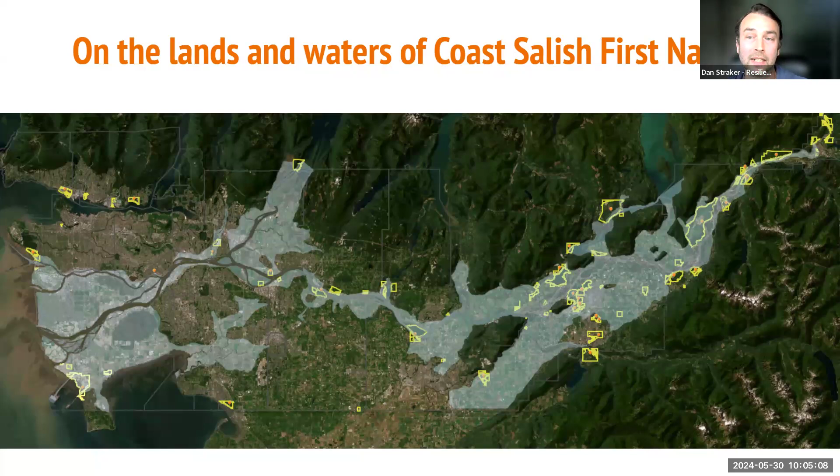A quick run through of our agenda today. We'll be doing presentations from our great panelists here and have a little bit of time for Q&A, and then we're going to shoot you into breakout groups, those of you that are brave enough to stick around and have some conversations about bank stabilization. We'd really appreciate your feedback. And this is an opportunity to say that we have Charlotte Milne here from UBC, and she's working with us to prepare a report on the findings from this workshop, as well as doing a lit review and some case studies on bank stabilization techniques. So your feedback in these breakout groups will actually get incorporated into a follow-up report.

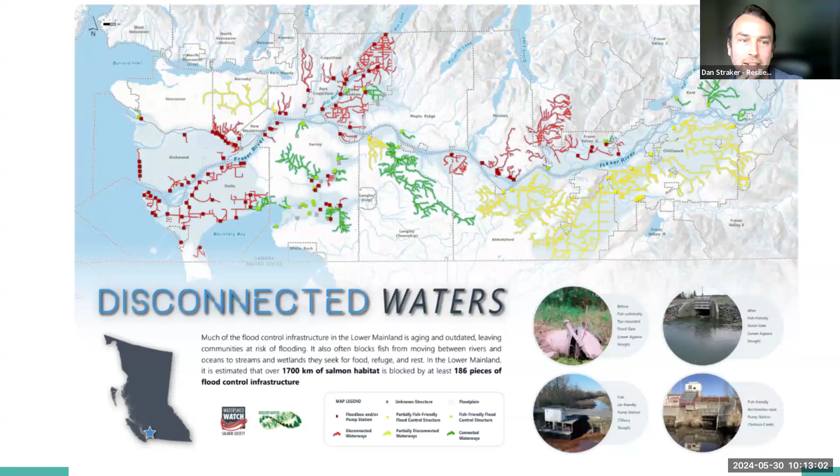So now we're up to 180 structures. Is that right, Lena? Yeah, with 1,800 plus kilometers of habitat, I think, or 1,700. Yeah, has been lost due to these pieces of flood infrastructure, floodgates, pump stations, and dikes. Today we're talking about banks because all those banks lead up to these flood structures, and I think there's just a value in talking about it.

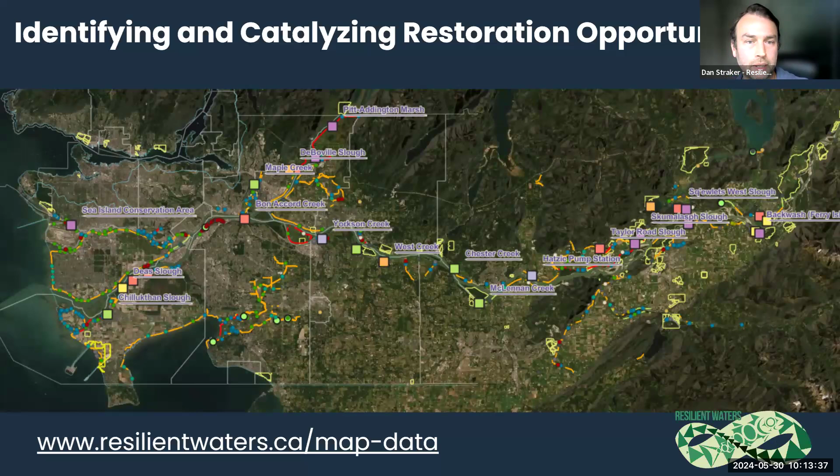Oh yeah, so just quickly to say, from the work that Lena was doing, we launched the Resilient Waters project in early 2020 to identify and catalyze restoration opportunities related to these pieces of flood infrastructure. You can check out the link there on the website, resilientwaters.ca, or get in touch with me if you have an interest in working on a flood structure that you think is barring salmon habitat. Then let's talk.

A quick note on the Lower Fraser Floodplains Coalition. This is a group that me and Lena and others in the group are part of. It's been working really since the atmospheric river in November 2021 on a more principled and collaborative approach to flood resilience for the Lower Mainland. And we're working basically to align with the BC flood strategy for regional work in the Lower Mainland now, as a quick update, as things have been progressing pretty nicely. And the reason I bring it up is it connects here. I think a lot of you are connected to that work in the Lower Mainland, so we're going to be talking with you soon.

The work that I do in the Resilient Waters Project is particularly oriented around this catalyzing of projects, and part of that is sharing information, sharing learnings, and building relationships. So that's a lot about what these webinars are about as well.

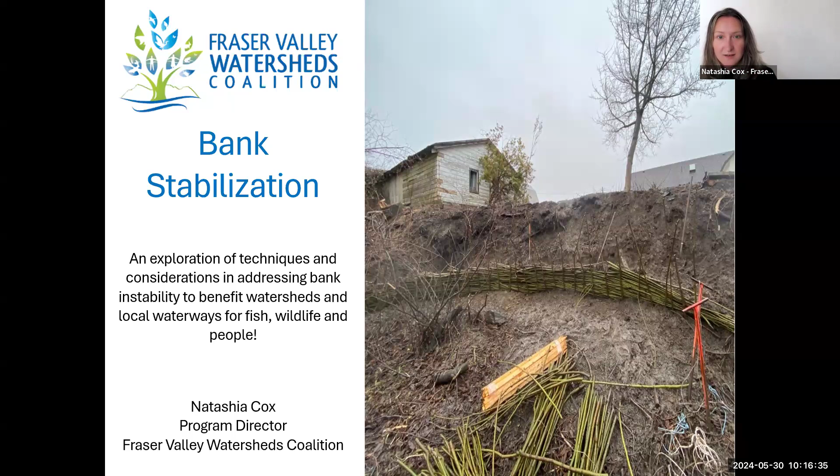All right. So I work for the Fraser Valley Watersheds Coalition, and we're going to dive deep into exploration of techniques and considerations when addressing bank instability, with the mindset of benefiting watersheds, local waterways, fish, people, and wildlife. So taking that multi-value approach. Next slide. Or can I control the slides? Oh, perfect. Okay, so at the end of my brief talk with you, the 4 takeaways that I

hope you come home with are that rivers are dynamic. Erosion is a natural process that can be influenced by human activity, but it's natural. And so when the coalition and partners set out to address a stability challenge, we need to really identify and understand what the issue is and develop clear objectives for what we're targeting. And we often use a variety of techniques that are applied together, and they have to be unique to the site and the objective of the stability project.

And of course, the last takeaway that I hope you see today is that we add diversity targets into design and implementation. We have to think about not just the bank itself, but what's happening around at the landscape level. Next slide, please.

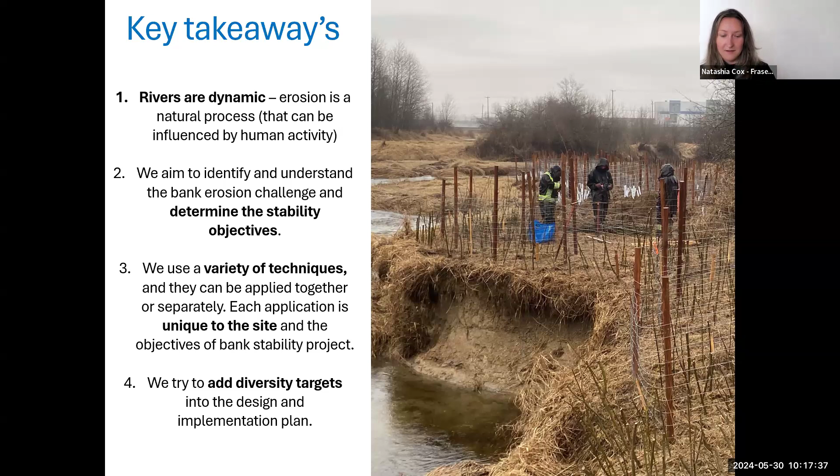So a bit about us. It's a snapshot. You can go to our website and you will see all about us. But essentially, we are a registered charity, and we've been in existence since 1997, and I think what we're most known for is actually doing the work. Next slide.

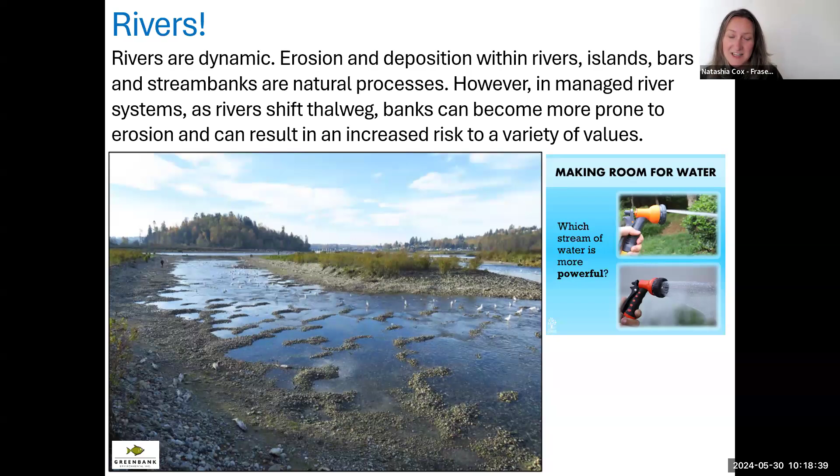And of course, I just flag making room for water, which is more powerful. If we have more space, could it be less detrimental in managed river systems? Next slide. So the key thing is identifying and understanding the challenge. So we really need to identify the scope. How big is this erosion? What are the drivers? Is it a result of constantly changing hydrology, like tides? Is it a result of floods, or is it a result of river management below dam stations? So understanding those drivers helps to identify what options we have.

And of course, what's being impacted by the results of erosion? Is it a culturally sensitive site? Is it salmon and salmon habitat? Are we at risk of losing trails and infrastructure and homes, or is it all of the above? Often it's a multi-valued approach. Next slide, please.

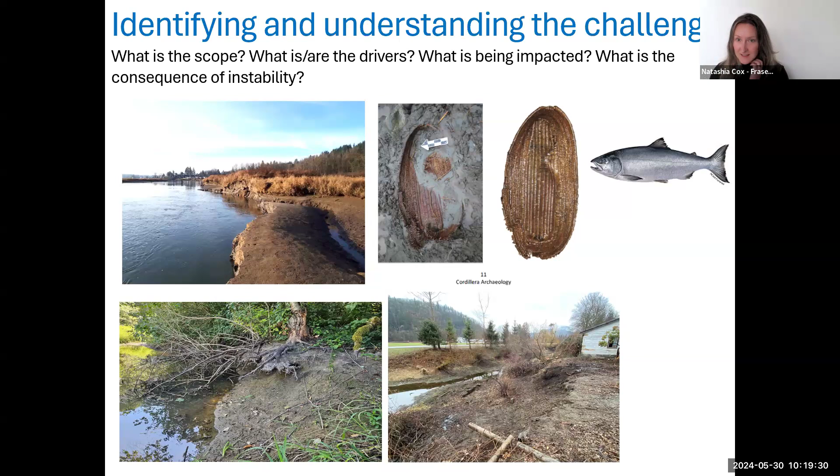So briefly, we're going to talk about the 4 things that the coalition has used: changing stream bank slopes, bioengineering and replanting, revetment with large wood and stones. And again, I'm going to reiterate that almost always we're using a combination of these techniques. So we'll dig in a little bit. So let's start with changing soil slopes.

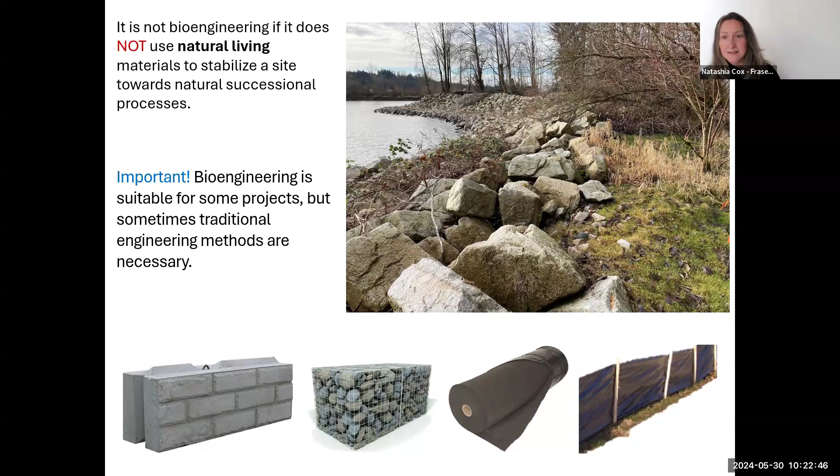One of the other techniques we use is bioengineering. So I just want to say what it isn't. It's not considered bioengineering if you're not using natural living materials to stabilize the site. Bioengineering has its place, but so do more engineered structural plans. So you really need to understand the application and use and the risk of not going harder with those more traditional materials. Things like the lock block, the gabions, geotech fabric, silt fences, they're not themselves going to grow, but they could be playing a supportive role if we wanted to shift into bioengineering techniques. Next slide, please.

So what is bioengineering? It's the use of indigenous living plant materials to perform an engineering function, help it grow. This can include using rock, soils, plants, and wood to help stabilize steep, unstable slopes. The two that we're going to look at a little bit are wattle fence and live staking. So again, the idea with bioengineering is that we're helping it grow and we're jump-starting natural successional processes, the structure of moving up the floodplain and into the forest and riparian ecology. Next slide.

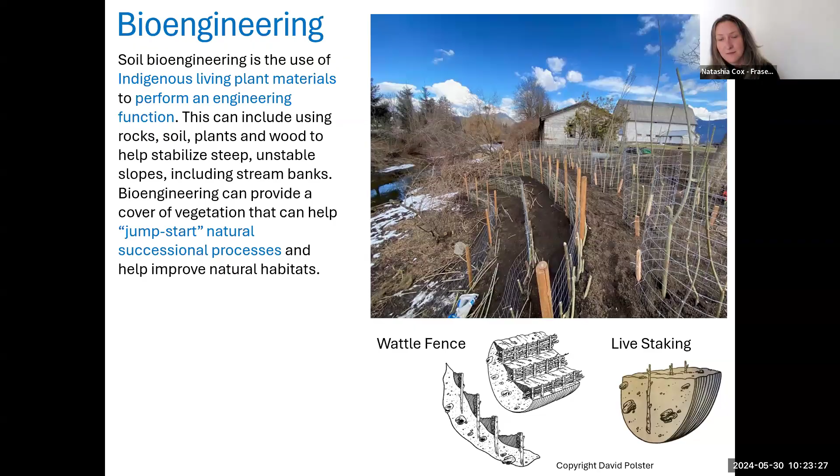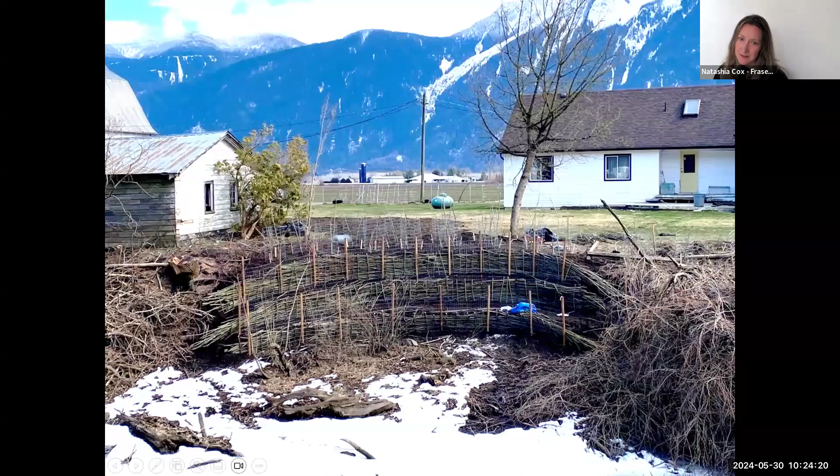Often in bioengineering, we need to introduce soil. Soil has been lost. It's been flushed away in the water course. We're sitting at the bottom of the creek, so we need to rebuild our organic growing medium. Next slide. So that same site, this is what it looks like today. We're essentially weaving growing materials to help it grow. You'll also notice wire cages because we have to think through not only helping the site grow, but what might it be at risk from as it's developing. In this case, we're trying to prevent impact from herbivory damage.

Next slide. And again, this is what it looks like in the spring of last year. And next slide. And now we're seeing a year's worth of growth of that site, and the farmer's much more happy because they're seeing this reestablishment of their stream bank. So we'll just go to the next slide.

Here you can see the applications you can use across a variety of different sites and systems. So whether it's helping stabilize different farm sites up the watershed, down in the watershed, vertical banks, even submersed in water, you can use this bioengineering technique where you're weaving these live stakes and materials and growing your bank stability. Next slide, please.

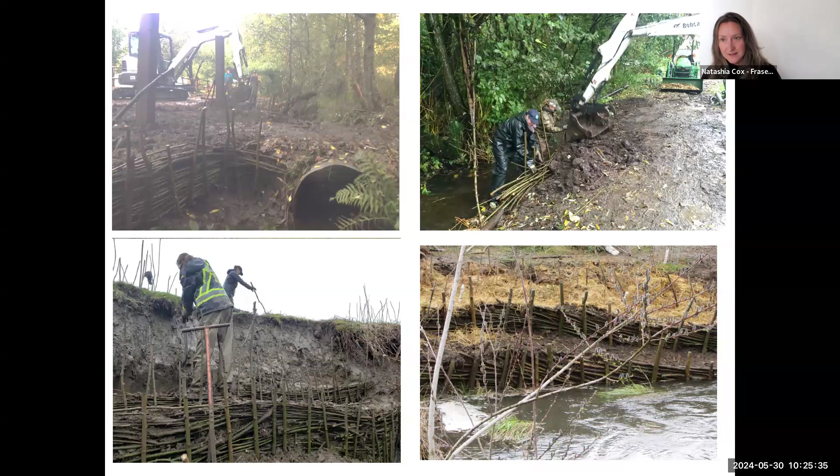So when we think about the techniques, we want you to think about what's usually used. Those pioneering species, willow, dogwood, cottonwood here in the Fraser Valley in BC. But you could use other things like hardhack and other species that will grow. You want to collect in the dormant season. You want to make sure that you're cutting the right size for your application. Sometimes the bigger stock we'd use for the posts might not be suitable for another application.

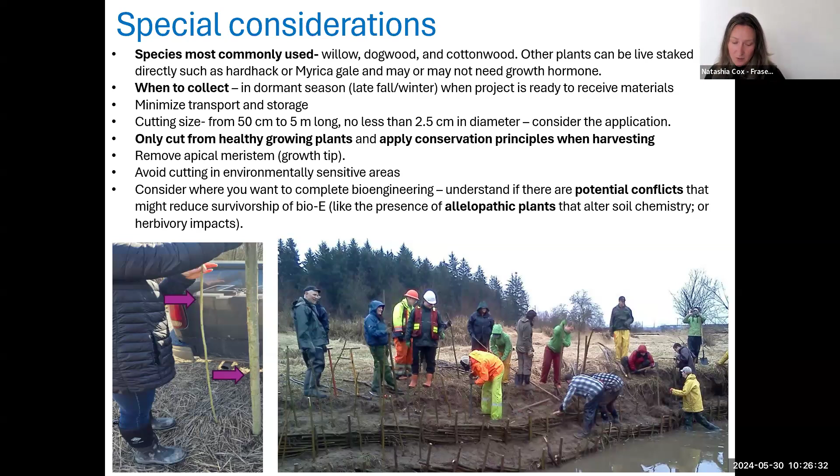Typical things to consider are where are you harvesting, making sure that there's no conflicts in the place that you are doing your bioengineering. So allelopathic properties: there's chemicals that can be released as a competitive edge, and you need to address that first, or your bioengineering may not function the way you want. Again, I talked about herbivory impacts. Next slide. 5-minute warning. Thank you.

Know about your acts and regulations. I just want to flag that when you're collecting and using bioengineering techniques, you want to look out for pests and diseases as well. As practitioners, it's really important that we do not spread things that can actually cause detrimental harm across landscapes. And I'm going to get you to go to slide 25 if you can.

So one of the things that we do often is put all the pieces together. So I talked briefly about bioengineering and changing the banks. We also do other large wood reef work where we're putting typical, more hard rocks and stones, riprap into the stream, but we're designing it in a way that it's going to benefit the bank stability, but also increase fish habitat. So in this case, you can see that there's a big stream bank that was eroded. That was a result of 2021 flooding.

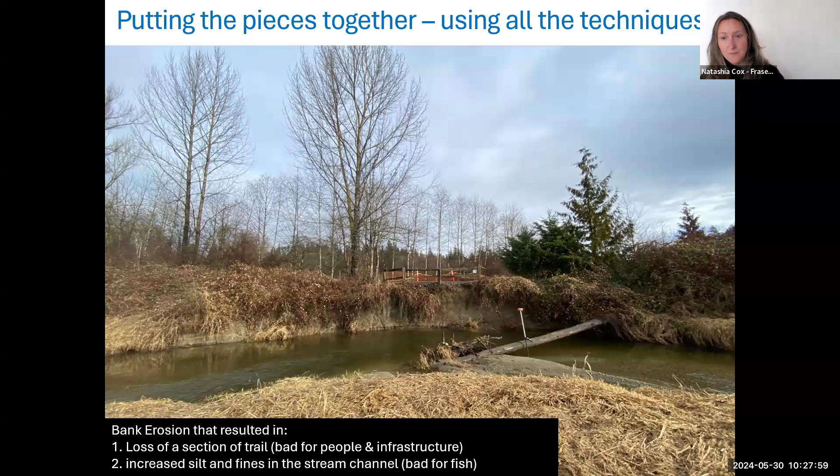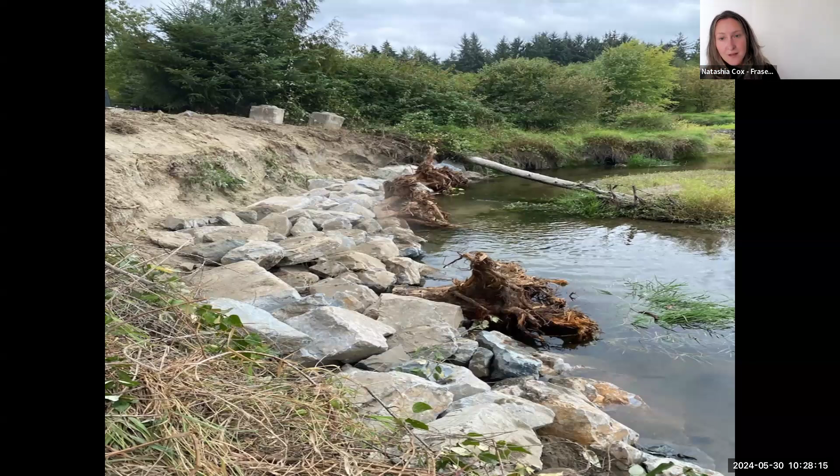The trail was at the top of the bank. You could see the photo there where they're flagging off was washed away and it was prone to more erosion. And so we wanted to apply all the techniques. So if you go to the next slide, we did use stones, but you can see we've driven in root wads and anchored them into the bank so that we're creating that complexity that will also shift the thalweg along the creek so it's not chewing on that bank there. And then we're stepping it up. Next slide, please.

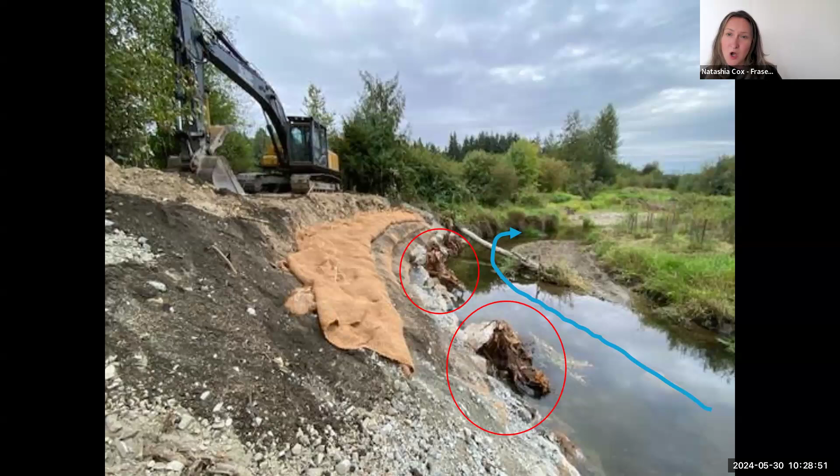Now these are called soil wraps. So we're trying to engineer a growing medium that's also been driven in and stabilized as we walk our way up the hill slopes. So this is an example, again, the flow, and we're moving our way up. Notice we're also, again, changing the slope of the bank. Key thing here is we had to go through all of the processes, including archaeological assessments, to ensure that when we do this work, we're not causing harm to other landscape values. We'll leave that aside for another day. Next slide, please.

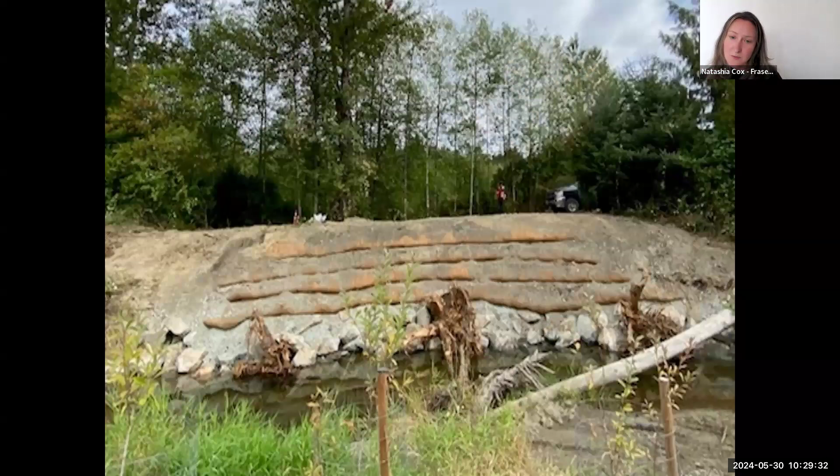Here it is. It's labor intensive. We've got our partners from DFO, cultural monitor on site, and contractors. This is handwork, machine work. We've got soil medium in there. It's seeded so that it grows on top of that riprap and on top of those stones and the wood. Next slide. And again, here it is at a different angle. So you can see how high up it is. Next slide. A different angle again. This is right after it was completed. Next slide again.

So I didn't get to all of the techniques, but what I would like to say is that you want to use the combination of tools. You want to really think through the things you choose to use as specific to your site. And I just want to acknowledge all of these people and groups that have been a part of one or more of the bank stabilization bioengineering projects that we've done across the valley over the last 10 years. Next slide, please. And again, these are the 4 takeaways I hope you got through my presentation. If you want the full presentation, please contact me. Thank you, Dan.

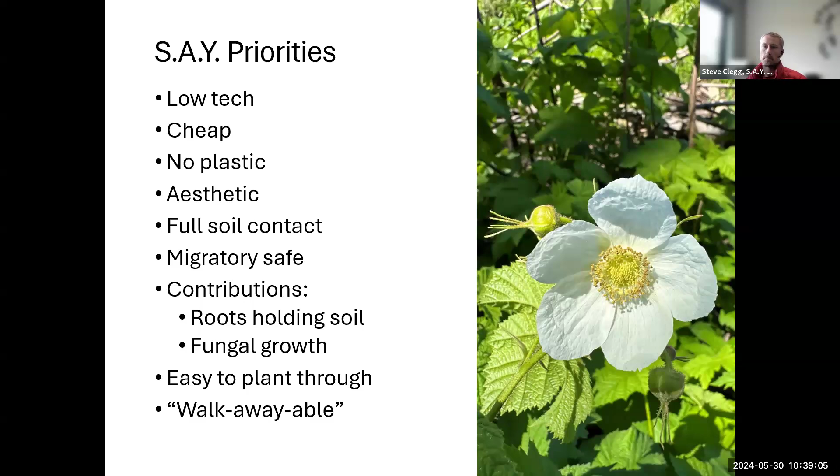So jumping into the two alternatives, again, this is not new to a lot of people, but we're just going to go through a couple applications that we've been using here at Saylands. This is seed and hand spread straw. So for the most part, I'm using fall rye. If I'm throwing this down later into the fall, closer to winter, then I'll use winter wheat. It's just a little bit more cold tolerant for germination, but primarily rely on fall rye.

And hand spread is big. The application for hand spread, I can go into detail, but it's a bit of an art. There's other ways to do it with shredding machines and blowers and things, but I'm a big proponent of the hand spread. So here's one of our sites. We had machines in there, cleaned out about 3 feet of accumulated sediment and invasive species in that stream. You can see I've already handled the far side. The close side here, you can see 2 straw bales sitting on the bank slope.

We're using straw because it doesn't contain a bunch of the weed seeds. And it's not expensive stuff. You can buy this from commercial distributors, but I also went to the farmer next door and said, hey, do you have any old straw that I can use? He said, no, nothing you'll like. It's all moldy in the barn back there. I said, perfect. I want mold. Bring it on. I want to jumpstart all these ecological processes on our site. So yes, mold is great.

So I went and bought this straw from him for $2 a bale. I've got 2 bales on that site, did that whole stretch of our project site for $4, added about $2 worth of fall rye seed on there. So my erosion sediment control for this site cost me about $6 and took maybe an hour or so. So you can't beat it from a price standpoint. Even if you add labor in there, it's still wickedly competitive and it's providing good results.

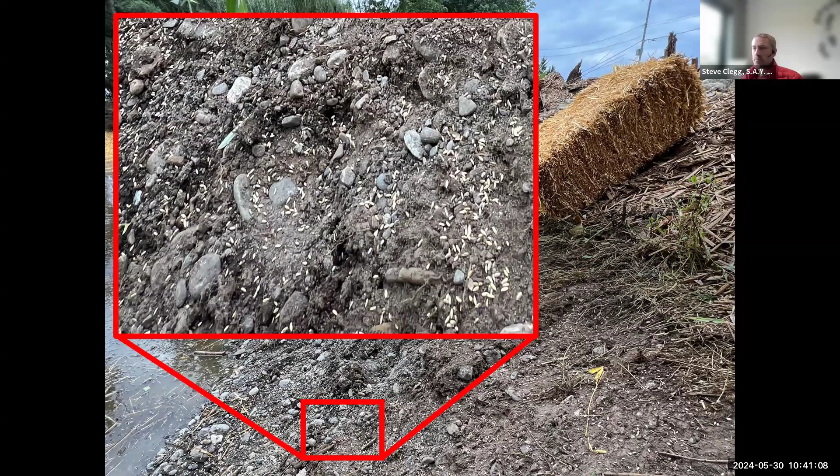So absolutely lay it on. Here's one of our sites that we did that application with. You can see that the application has gone right down to the water. We've got steep slopes that we've applied it on. We've got shallow slopes that we've applied it on, and it's really locking that stuff in well. So this was August of last year.

And then we come back to the exact same site, just coming at it from a different perspective, looking in the other direction. And you can already see that there is a green sheen coming through all of that hand spread straw. That is fall rye, and that is only 8 days later. Those shoots coming out of that are already 3 inches tall.

And I had a contractor laughing at me and saying, hey, you think that's going to hold as the storm... it's sunny in the picture, but a storm was coming through. And he's laughing at me thinking that this was a joke. I made him come out of his machine, walk all the way around and said, go pull one of those little shoots out. So he did. He walked all the way around, tried to grab one of those shoots, yank, yank, yank, and ended up snapping the shoot off because the roots were so bound to the soil at that point.

So that whole slope is absolutely locked in after 8 days. So that changed his mind, and we weathered that storm completely perfectly with no additional sediment into the stream. As bonus points, we had wood ducks move in. These two gave us their stamp of approval and brought 35 of their additional friends here, and we've got quite a wood duck population that hang out in this section of stream now.

A couple examples of that, some before and after. You see September 13th, we've got about 3 feet of accumulated sediment and invasive species choking out this stream. We pulled that out October 20th, so not too far later. We have weathered a few precipitation events, and we've got our fall rye and hand spread straw locking in the banks on both sides. It's already rooted in place.

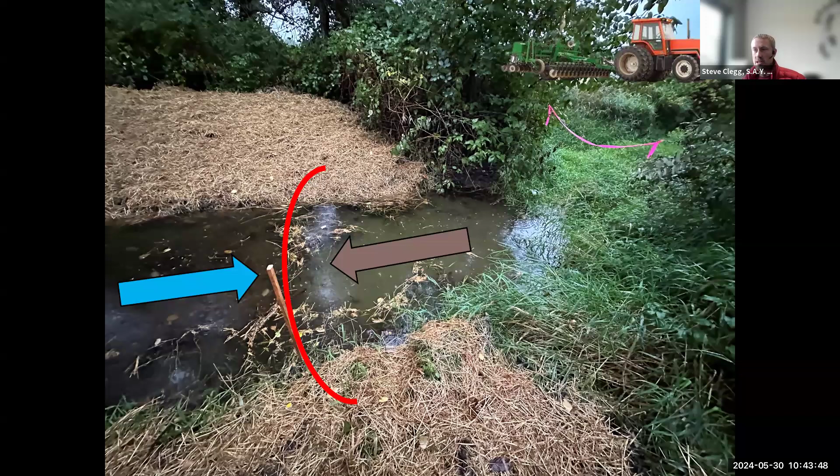field that is dumping sediment-laden water from the farm field into the stream, and it's actually pushing back up into our project. So this one is showing that our project provided good clean water, and downstream effects through the same precipitation event pushed sediment-laden water up into our site. So we were happy with the success of our project, especially in comparison to how things are faring in other sites. This spring, that's the same site that we showed you earlier, so it's really locked in tight. We've got good growth on there, and the banks are nice and solid.

Moving to topic number 2, we'll blitz through this one. This is an alternative to the erosion sediment control fencing. It is using wood mulch. I love the mulch. It comes with beneficial bacteria, fungal relationships, insects in there, and adds to soil nutrient and organic material. Here's one of our sites, and the first thing you might think of is, oh my goodness, you're putting a whole bunch of soil next to a stream.

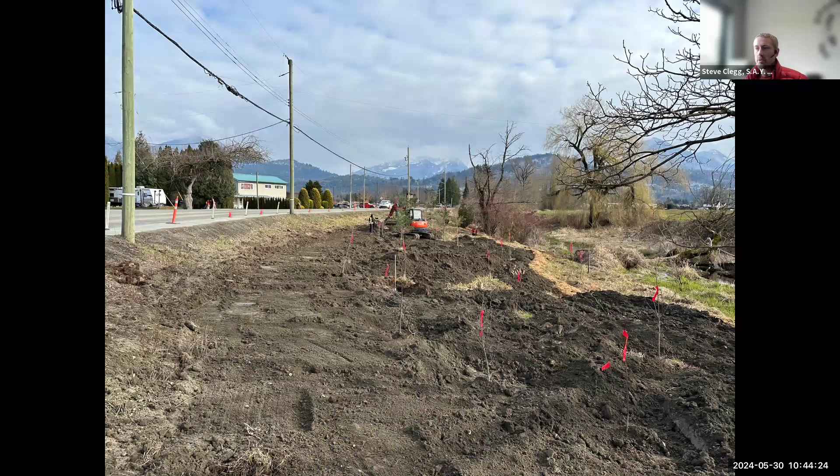But then let's zoom in a little bit at this section. One thing you'll note is we've laid a big berm of wood mulch above top of bank. It's about 24 inches wide, 8 inches thick. It's above the level of the soil. It acts as a barrier there.

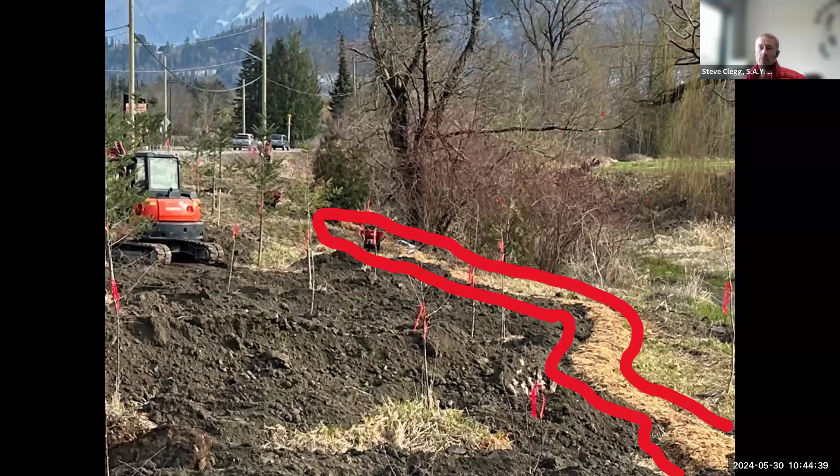And then we've added our soil, planted our trees, we've got our nice rough and loose soil there. And then we come in and spread the wood mulch over top of everything, linking the surface of the wood mulch across the entire site into our original wood mulch berm, keying it right in, and it's walk-awayable. We don't need to come back and remove that. We can plant live stakes right through it. It is completely natural in there, and we're walking away from that site.

The mulch berm is still there, but we don't have to go back and maintain it or dispose of any products from that site. There's 1,000+ plants planted in there just a little while later. That mulch berm is still performing excellently. Water quality results are still showing that we've got 0 sediment running into that water course.

With that, I throw up, again, not to be asked or answered now, but some discussion points for later in the day. Let's talk about insulation of mulch. For the extension of growing season, root development, we've had massive positive implications for that. Moisture retention, especially during climate change and longer durations between rainfalls. Drought stress in our trees is becoming a real concern, so moisture retention is a big thing.

Beneficial insects, we've watched cascades of trophic profiles moving through our sites, from fungus to bugs to spiders to birds, all the way through after adding mulch. So it's pretty impressive. And then fungal growth, as we all know, mycorrhizae relationships are a growing field and super important. So lots to discuss with this.

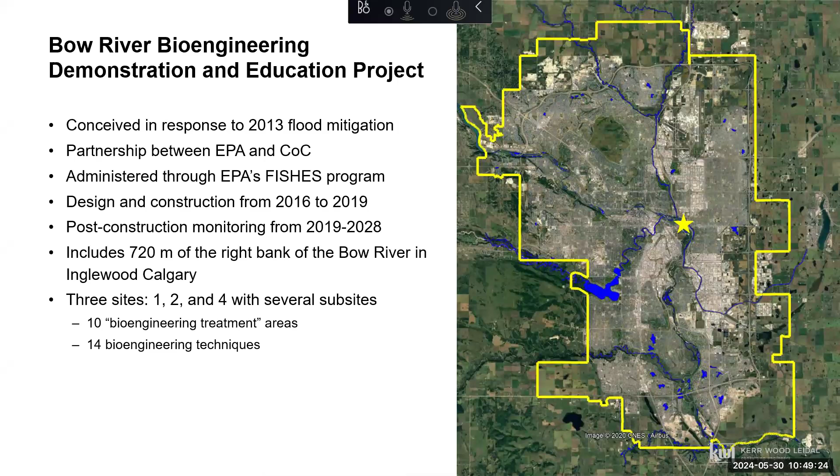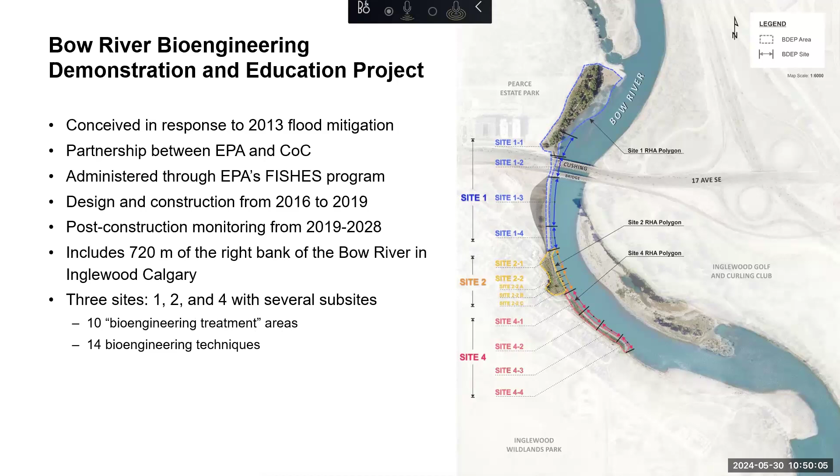So starting with Site 1, it's 370 meters long. It starts upstream of these 2 bridges.

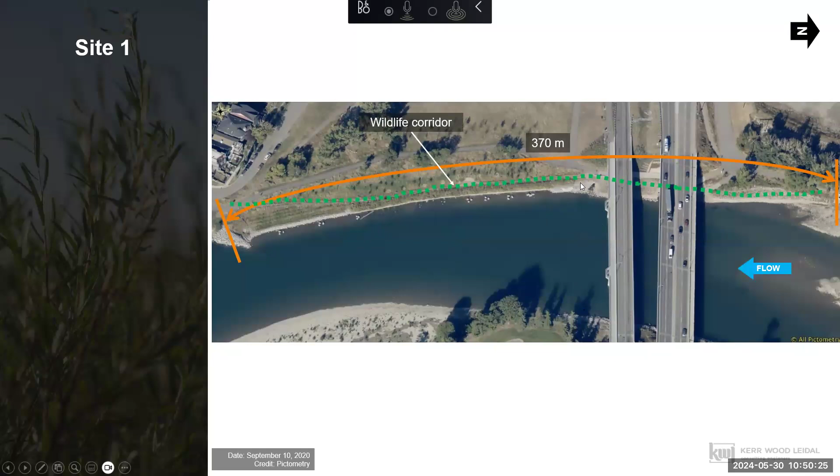And one of the key features to the project was to include a wildlife corridor to improve passage and connectivity between upstream and downstream of these bridges. So we really focused on making sure that happened, and we widened the area under the bridges. And the first site on the upstream end really was a gravel pad or a riprap pad that we void filled with gravel material, and then planted rooted live cuttings, also known as tall rooted stakes. That was really intended to improve that passage, the sight lines under the bridges.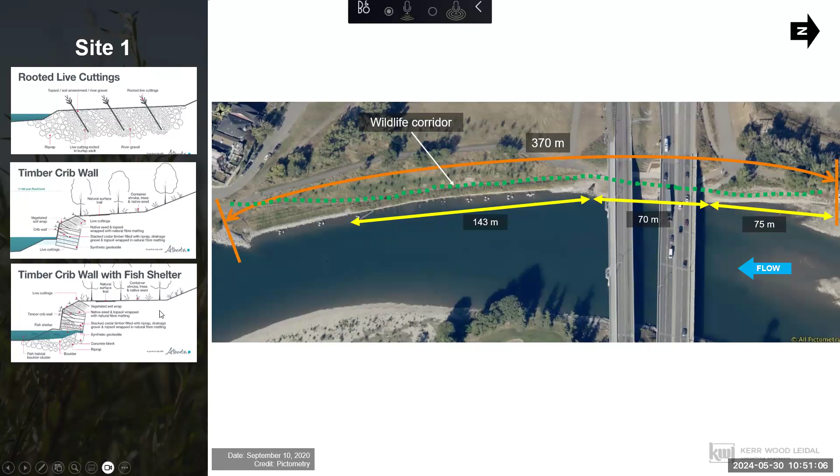And then on the downstream side of that, we have timber crib walls with vegetated soil wraps above that, and then riparian planting. And in one of those 2 sections of that timber crib wall, we included what might be considered lunker bunkers. So we call them fish shelters in the project. So that was a local lowering of the bed below the timber crib walls and supporting those timber crib walls so that there were niches underneath. And then on the downstream, about 80 meters or so, we have a brush mattress with a rock toe, and above that, contour fascines and brush layers.

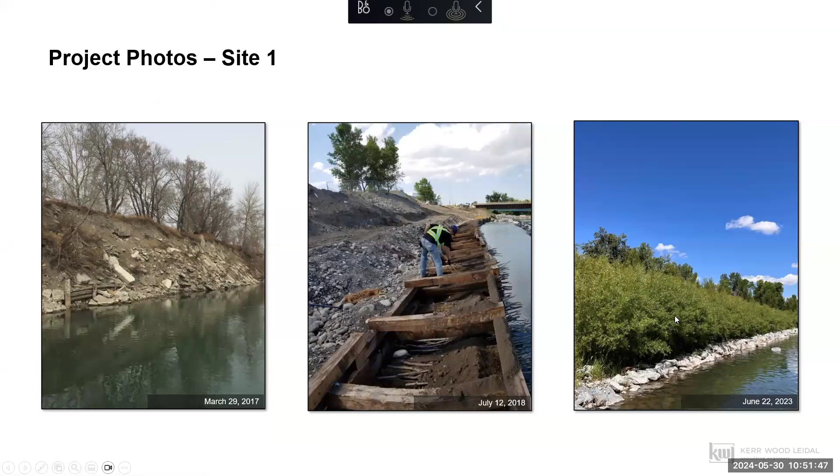So here's some photos of the site pre-construction. So you can see lots of debris there. We ended up pulling out about 2,000 tons of concrete and steel and all that kind of debris out of the bank. This is construction here, a photo of the timber crib wall. You can see the live cuttings placed in there in a brush layer fashion. And then in 2023, we came back and did an assessment on the site as part of post-construction monitoring, and you can see what it looked like in 2023.

So Site 2 is a bit more hydraulically protected from the Bow. So we tried some different, more vegetative techniques. There was also an existing bank swallow colony. So for the upstream, we tried to minimize our disturbance to the bank swallows, and we just put a toe fascine or a box fascine along the toe of that bank. That toe fascine or box fascine continued through the whole site.

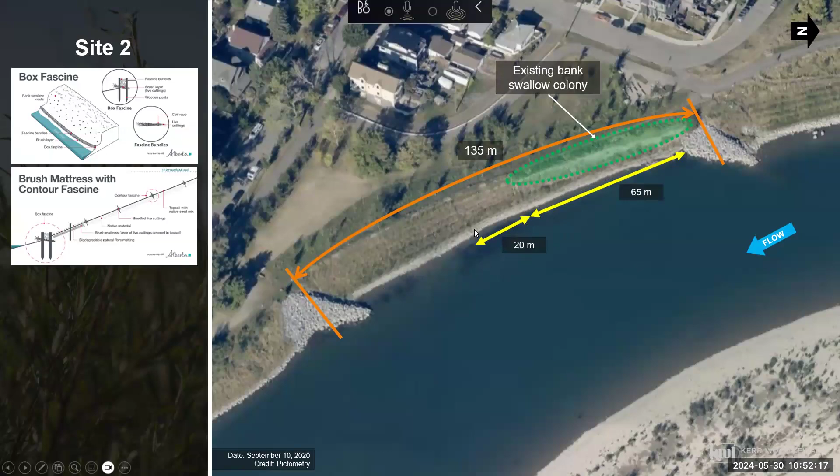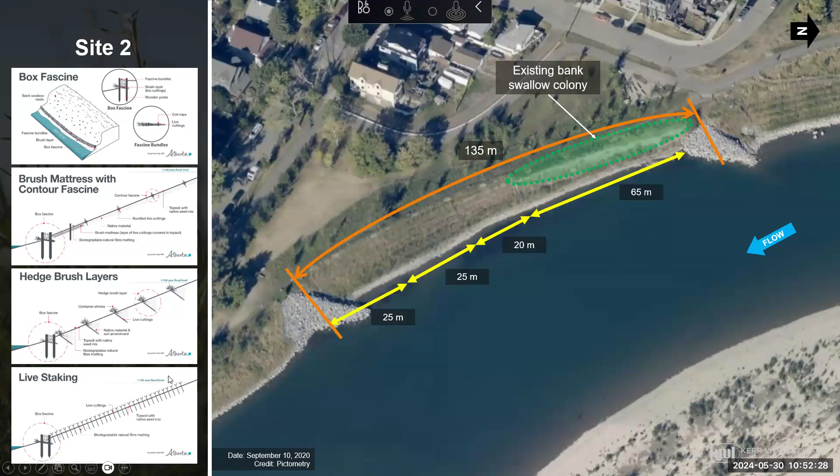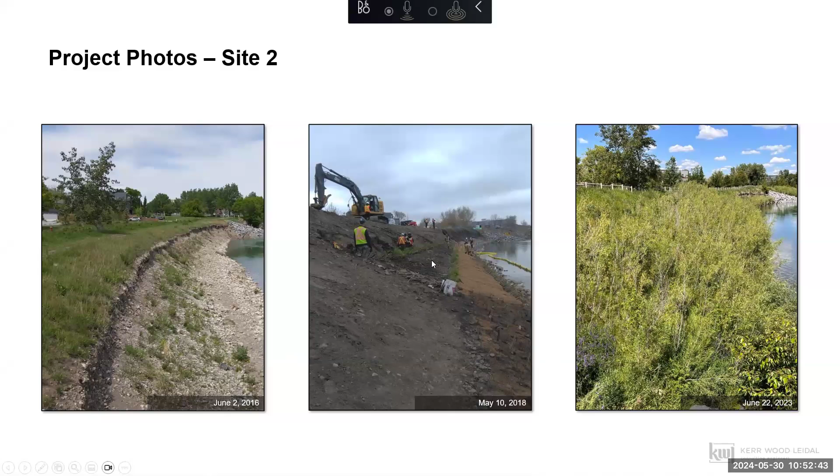But then downstream of that, we had 3 different treatment areas. The first one had brush mattress with contour fascines. The second one had hedge brush layers, which is a traditional brush layer with a container plant included. And the third one was high density live staking, with spacing of about 1 foot or so. So pre-construction, hardly any vegetation on the bank. And then as you see the construction here, in the foreground there's live staking, in the middle of the picture you can see the hedge brush layer getting installed. And then 2023, the growth there at that site.

So site 4, one thing to know about this site is that we were kind of draping our project over top of existing work. After the 2013 flood, this road was actually cut in half by erosion. It was approximately 30 to 40 meters of erosion in this area. So the bank was rebuilt, the road was rebuilt, but what was left behind was quite a bit of riprap that was showing. So in this section of the project, we were piloting some ways to retrofit existing riprap with vegetation. In the upstream section, we covered the riprap with soil and a reverse filter, then topsoil, about 600 mils, and then planted that.

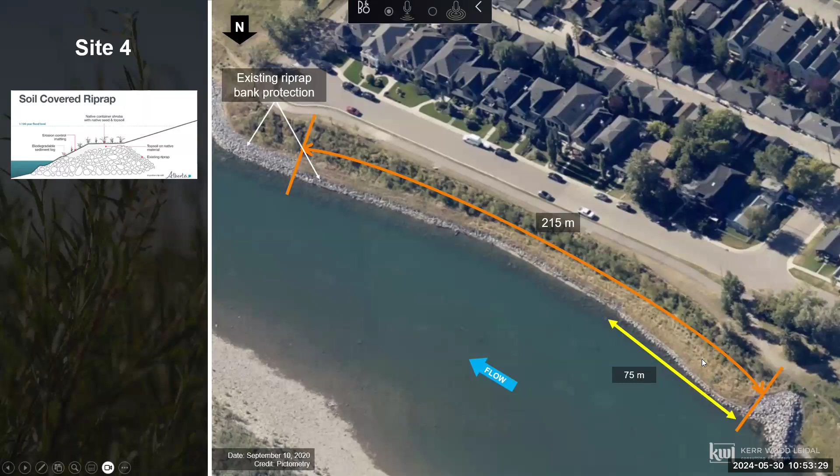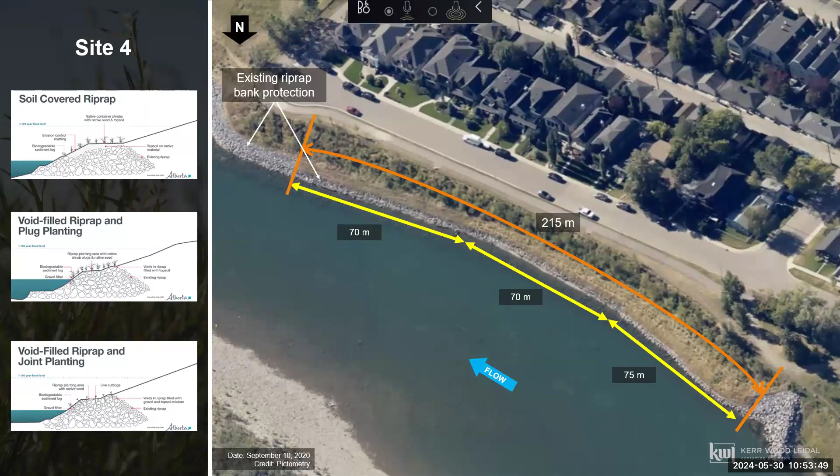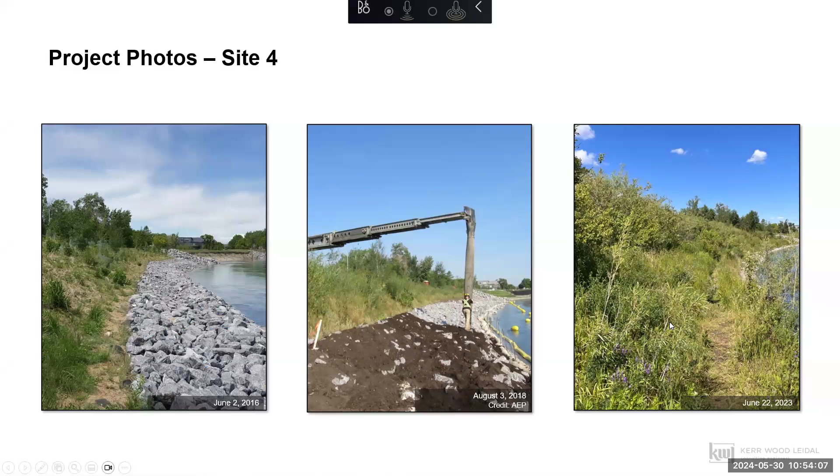In the middle section, we void filled that riprap with topsoil and then planted plugs within that matrix. And on the downstream end, we void filled that site with pit run, so a dirty gravel 3-inch minus, and then put live staking in that matrix. So some photos here. This is what the existing conditions look like on the left. You can see that there's a riprap bench there. During construction, we tried to void fill that riprap with planting material. In this photo, we're showing the topsoil. And this is what the site looks like in 2023. So quite a bit more growth there than existing.

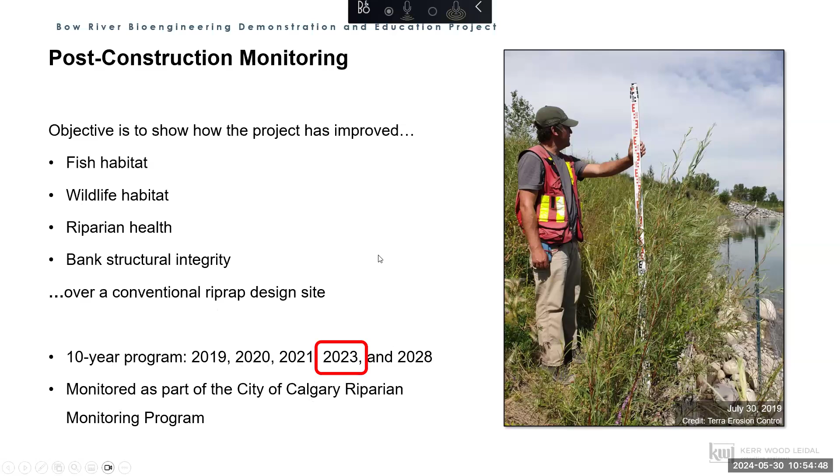So I wanted to go through quickly the post-construction monitoring, to explain a bit of the successes of the site as we've monitored it over the past 5 years. The objective of the post-construction monitoring is to show how the project has improved 4 different components: the fish habitat, wildlife habitat, riparian health, and bank structural integrity. And all of that's compared back to a conventional riprap design site. It's a 10-year program. We're monitoring 5 out of those 10 years. And today we'll be talking about the 2023 results. It's monitored under the City of Calgary Riparian Monitoring Program, where we've looked at almost 70 different bioengineering sites across the city from 2018 to 2022.

So for the purposes of the presentation, just considering time, I'm going to skip over the fish and wildlife side of things, focus more so on the riparian health and the structural integrity. But suffice to say that the fish are using the site and the wildlife are using, we've observed them using wildlife cameras, using the wildlife passage corridor.

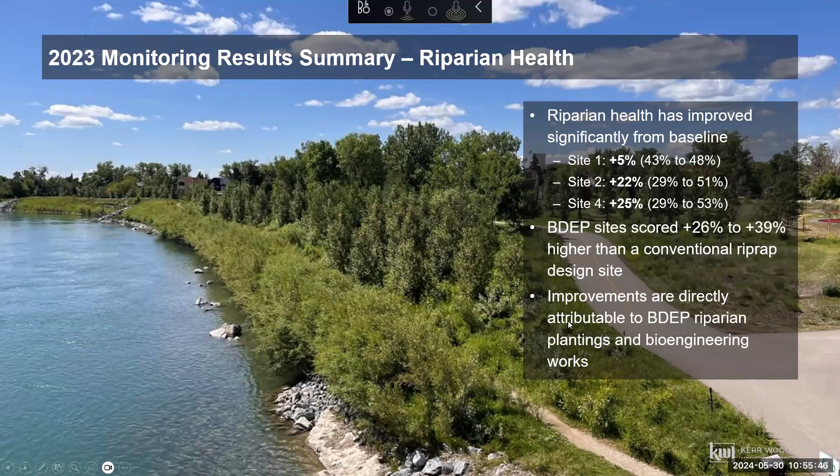So in terms of riparian health, we've seen the significant improvements from baseline using an approach called the riparian health inventory. So site 1, site 2, and site 4, you can see the results there. So significant increases. Overall, the BDEP site scored between 26% to 39% higher than a conventional riprap site. So we're comparing that back to a conventional riprap site. And then ultimately, we've concluded that the improvements are directly attributable to what we've done in the bank here in terms of riparian plantings and bioengineering works.

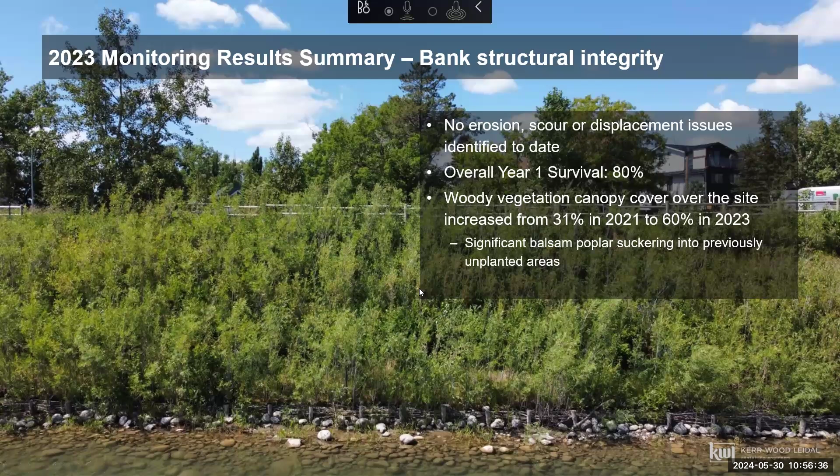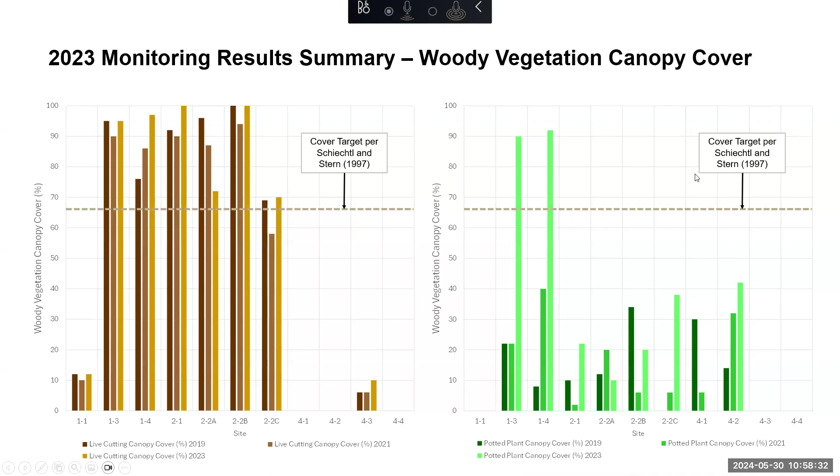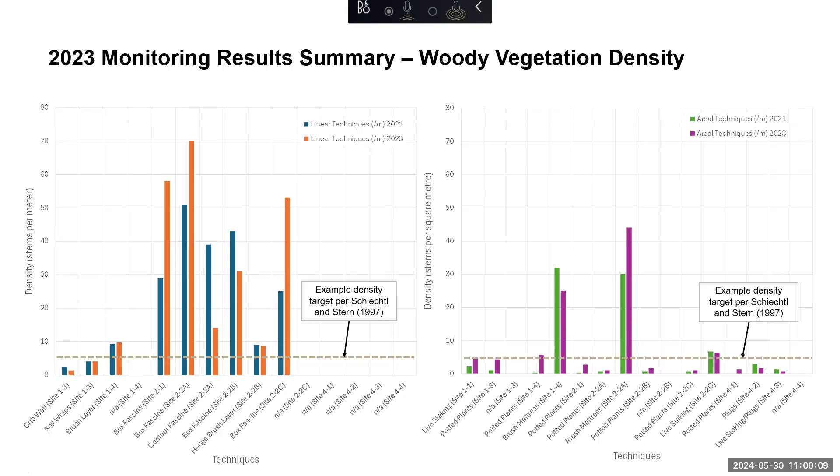So at this point, just wanted to acknowledge the partners, so City of Calgary, Alberta Environment Protected Areas, and the consulting team and contractor who designed, built, and monitored this site. Thank you.

Very cool. Thanks, Mike. That's awesome. Oh, so here we go. That's a whirlwind of bank stabilization techniques. Lots of cool stuff to think about. We're now at the end of the presentations. I think what we can do, actually, before I even show these off, is take a few moments. If there's anybody that has any questions, you can raise your hand. We won't spend too long doing the Q&A, but yeah, Natasha.